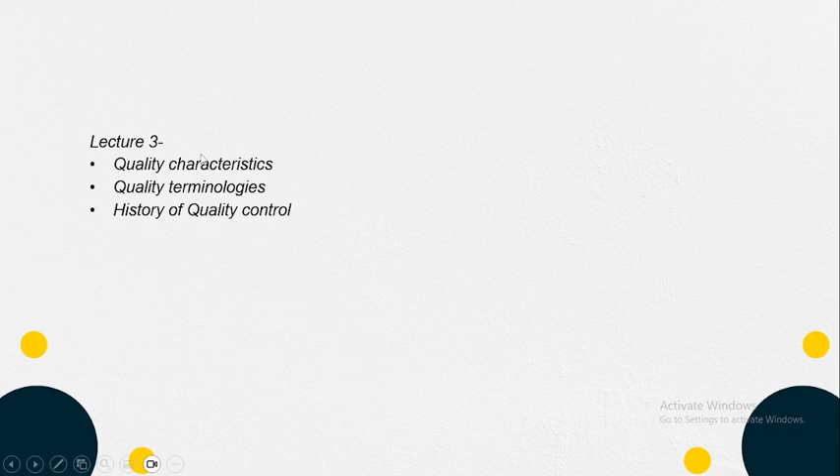So today I'm going to continue the talk about quality, and now we're going to be looking at quality characteristics, the terminologies for quality, and the history of quality control. So now before I go on to the quality characteristic, I'd like to explain what target or nominal value is in quality management.

So this is basically something that speaks to the benchmark or the goal that a producer or designer is seeking to meet in a product. So it's a benchmark or goal sought after in a product. It is kind of a desired value for a quality characteristic. It is the value of measurement that a designer seeks to achieve for a quality characteristic during production or performance.

So quality characteristic can speak to maybe the length, the size, the weight, the look and feel, the function, based on what we have seen in the dimensions I spoke about in the previous video. So the target value is more like the benchmark. This is the length that I want this product to have. This is the weight. This is the height that this product should have. This is the way this product should look. That is the standard. So this basically is what target value is all about.

And now it is also important that we note that no two products are ever identical, and that is where variability comes in. Variability speaks to the differences that exist in products, and producers, manufacturers, businesses always seek to ensure that this variability is as low as possible, because customers would always reject and will not accept products that are very large in variability.

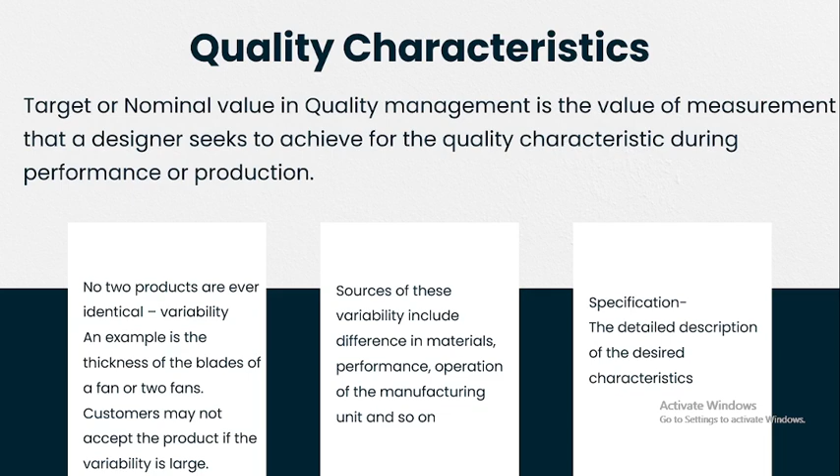Now, specification also speaks to the detailed description of the desired characteristics. We all know that whenever we want to purchase some items, they list out the specification: it has this length, it has this breadth, it has this camera size, it has these camera features and the like. So the specification in terms of quality characteristics speaks to the detailed description of the desired characteristics that you want to have in a product.

Now, we're going to be looking at the next one, which is important terminologies in quality management. Okay, we have the upper specification limit, which is the USL. We have the lower specification limit, which is the LSL. The upper specification limit is the highest allowable value for a quality characteristic. That's the highest your quality characteristic can go.

Remember, we have a target. There has to be a target in each of the quality characteristics. So the upper limit just tells you this is the highest your product can go in terms of the quality characteristics, say for example the height. If you are producing something and your target is 30 centimeters, the highest that chair or that table can go is 32 centimeters. That is the upper specification limit. And then the lower specification limit speaks to the smallest allowable value for a quality characteristic.

Now I'm going to give an example. But before I give an example, I'll move on to the non-conforming product, which is seen as being defective. Any product that doesn't meet one of the specifications is considered defective. A defect is the non-conformance to the specification that has been put in place. An example is a chair. Let us consider the quality characteristics to be the length and the height.

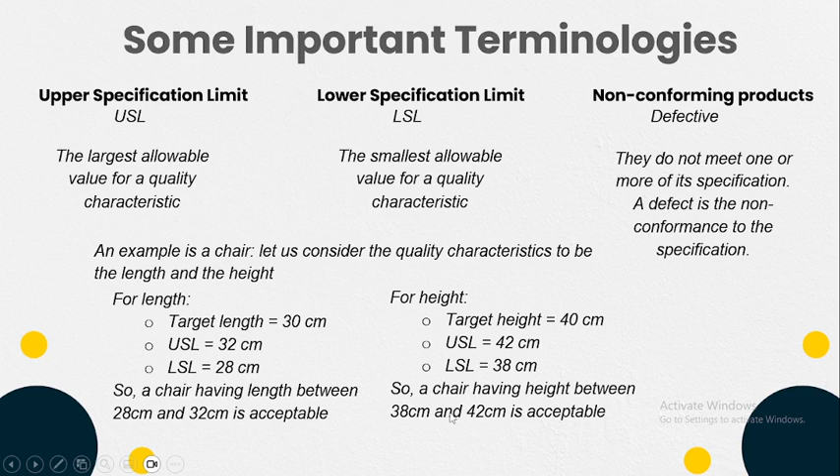For the length, you have a target length of 30 centimeters, and you've said that your highest allowable value for this length is 32 centimeters and the LSL is 28 centimeters. So a chair that has a length within this range is considered acceptable. Also for your height, a chair having a height within this range is also considered acceptable. So now I'm going to be drawing a graph just so that I drive home the point.

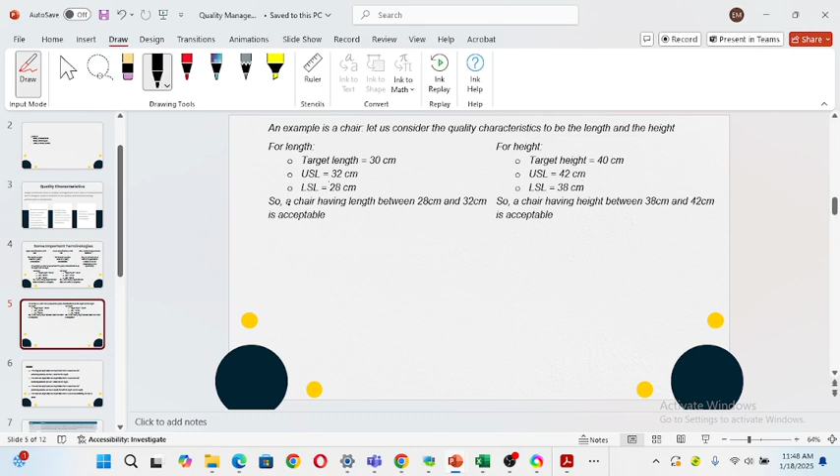Now let's consider this example as we saw in the previous slide. The target length for this quality characteristic for this chair is 30 centimeters, but if it falls at 32, it's still acceptable. If it falls at 28, it's still acceptable. And also for the height, if it falls at 40 centimeters, our target, it's acceptable. And if it falls within this range, it's also considered acceptable. So I'm going to be drawing so that I also explain what I mean with a graph.

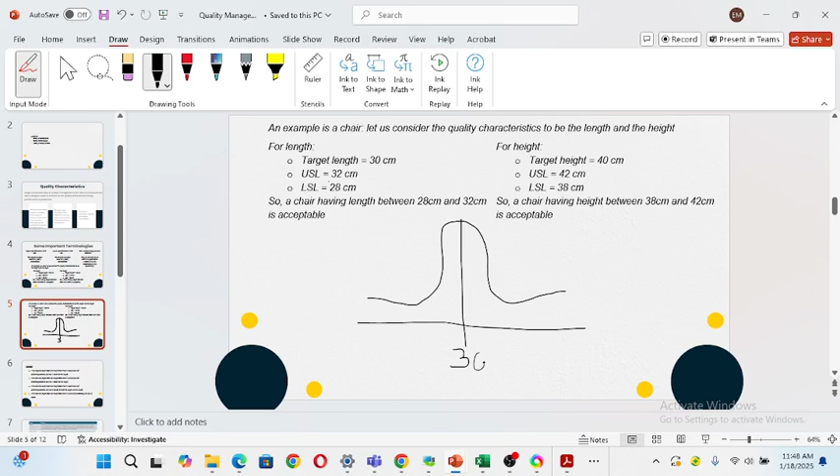Okay, so now we are going to be looking at the length. This is our target, which is 30, and over here we have our LSL, which is 28 centimeters, and over here we have our USL, which is 32 centimeters. So the range between here and here is 2 centimeters, and between here and here is another 2 centimeters. So these are the variability.

This from here to here is the variability that exists: the variability in terms of it being higher than the target, and the variability here in terms of it being lower than the target. But if the product falls within this range, this variability level, it is considered acceptable. Remember, this is the LSL and this is the USL, and we've also established the variability being 2 centimeters lower than the target and 2 centimeters higher than the target.

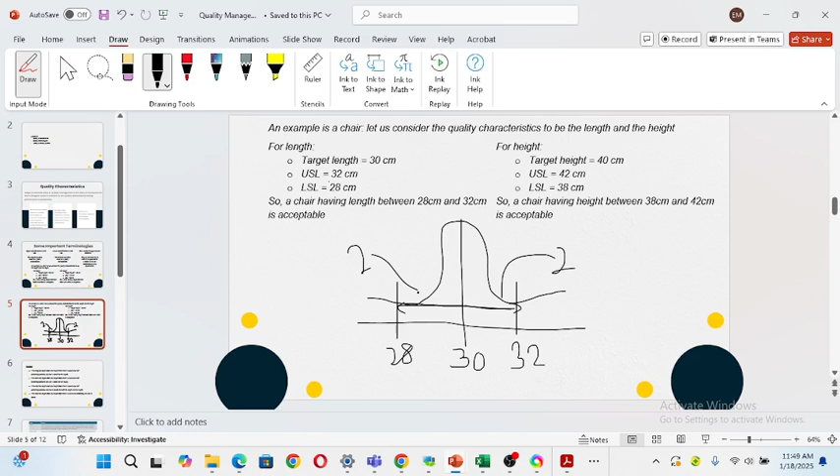So let's quickly move on to the next one, considering some examples. Now we're going to be also looking at this review. So if a chair has a length of 32 and a height of 37 centimeters, remember, even if the defect is in one aspect of the criteria, it is considered as being defective. It has to go through the manufacturing process again to be adjusted.

Now this chair has 32 centimeters and a height of 37 centimeters. Because it is lesser than the lowest allowable measure, it is considered as being defective. It has one defect based on the height. Now, if the chair has 33 centimeter length and 39 centimeter height, it's considered as not acceptable because the length is outside the range that we have specified for the product.

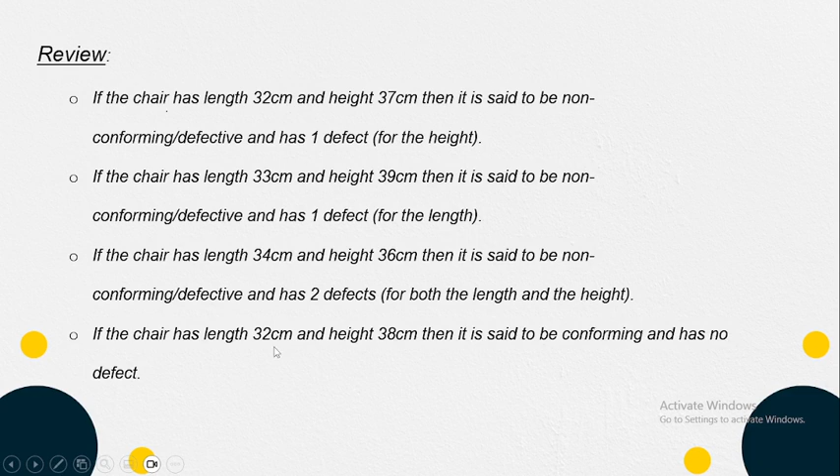Now, if the chair has a length of 34 centimeter and a height of 36 centimeter, across the two quality characteristics, it is not conforming and is considered as being defective. Now, for a chair that has 32 centimeter and 38 centimeter, length and height respectively, it is considered as being conforming and has no defect and would be allowed to go on to the customer, sold to the customer.

Now we're going to be looking at the history of quality control, and a lot has happened so far. Concerning the history of quality control, a lot of things have been put in place, a lot of implementation, a lot of teams have come together, a lot of departments have been established, a lot of products and materials have also been put in place to ensure that quality is maintained across board, across all interaction.

In 1875, scientific management principles divided work into smaller, more easily accomplished tasks, and this focused on productivity. In 1900 to 1930, this productivity and quality was improved on by Henry Ford. And he developed self-checking and in-process inspection.

Moving on to 1907 to 1908, within this time period also, AT&T began systematic inspection and testing of products and materials. And Gosset also introduced the t distribution, the t-test statistical method, resulting from his work on quality control at Guinness Brewery.

Now in 1915 to 1919, the British government began a supplier certification program to drive or change the behavior, to make sure that every manufacturer and supplier maintains the quality that they have stated in their policies. Now in the 1920s, AT&T Bell Laboratories also formed the Quality Development Department, emphasizing quality, inspection, test and product reliability. All of these were done to maintain quality and control quality.

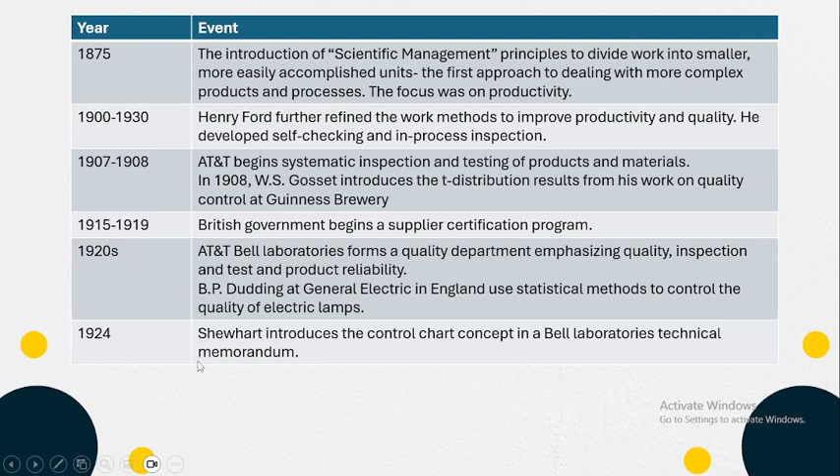Now in 1924, Shewhart introduced the control chart concept in a Bell Laboratories Technical Memorandum. We're also looking at the acceptance sampling methodologies that were developed by Dodge and Romig at Bell Laboratories in 1928. Shewhart published Economic Control of Quality of Manufactured Product, outlining statistical methods for use in production, in 1931.

Now in 1946, ASQC was formed as a merger of various quality societies, and the International Standards Organization was founded. Deming was also invited to Japan by the Economic and Scientific Services Section of the U.S. War Department to help occupation forces in rebuilding Japanese industry. A lot of things were done during this time in Japan to improve their quality and also improve the acceptance of their products by customers.

In 1948, Taguchi began study and application of experimental design. Deming in 1950 began education of Japanese industrial managers. Statistical quality control methods were widely taught in Japan at that time. In 1987 as well, the International Standards Organization published the first quality system standard, which many organizations began to adopt.

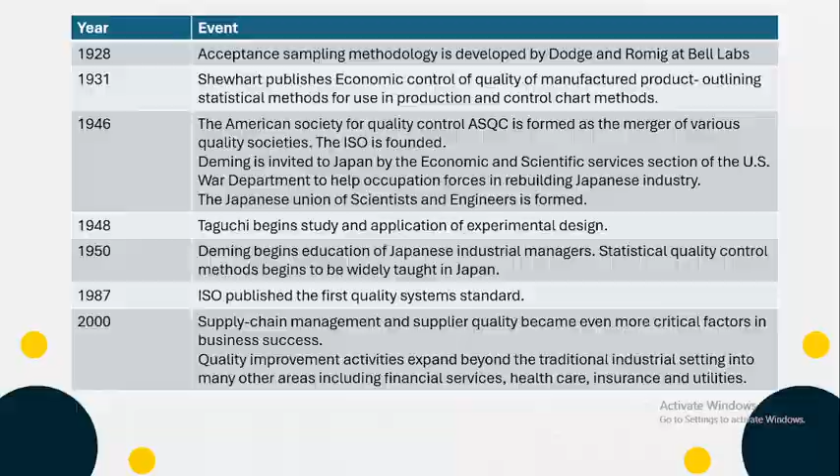In 2000, supply chain management and supplier quality became even more critical factors, and quality was also expanded beyond the traditional industrial setting into many other areas such as the financial sector, bank services, healthcare, hospitals, insurance companies, and also other utilities. So basically this is where I'm going to stop today.

In the next video, we're going to be looking at the management aspect of quality, part 2.